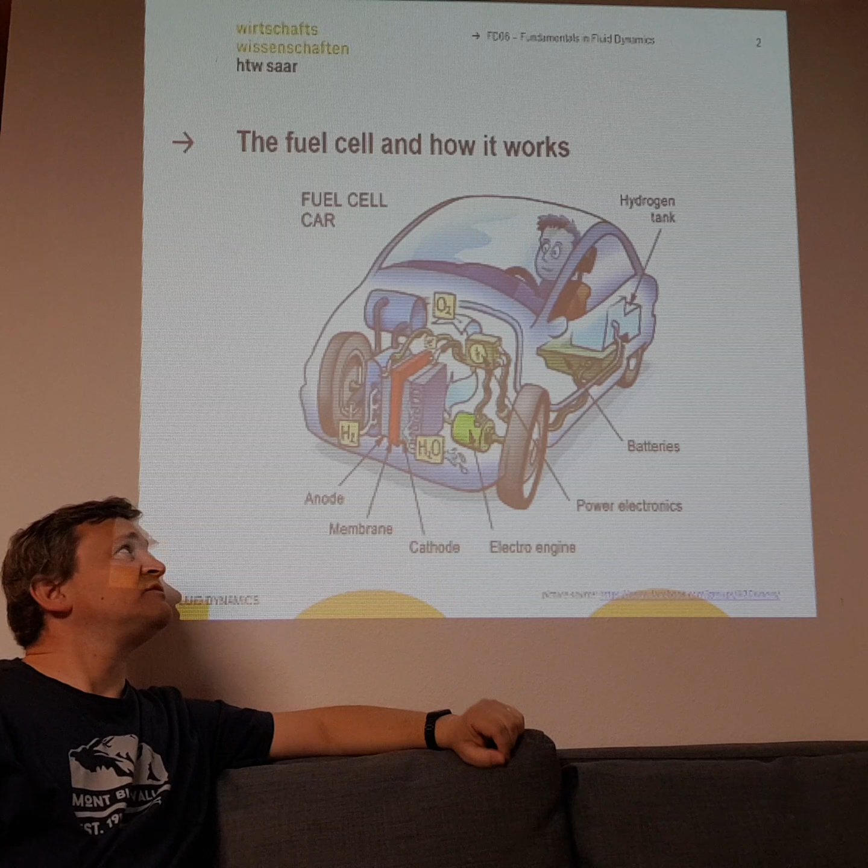At first, you ask me why do we need fluid dynamics? We have learned a lot about fluid statics, we have learned about the fluid properties, and fluid dynamics is still a really important topic for all kinds of technologies. And even if we get a change now from combustion engine cars, combustion engines have a lot of fluid dynamic problems, but even if we change now to fuel cells, to hydrogen fuel, we will have a lot of fluid dynamics problems.

For example, if you have here a kind of fuel cell car, we have fluid flow at different positions. We have fluid flow of water, and we have also big problem of cavitation, of icing here. We have fluid flow of hydrogen, we have fluid flow of water. We have to cool the batteries, and we have to look also at the hydrogen tank, and we can have also turbochargers for hydrogen or for air. And that's all fluid dynamic problems. So we must have a close look at fuel cells now in future.

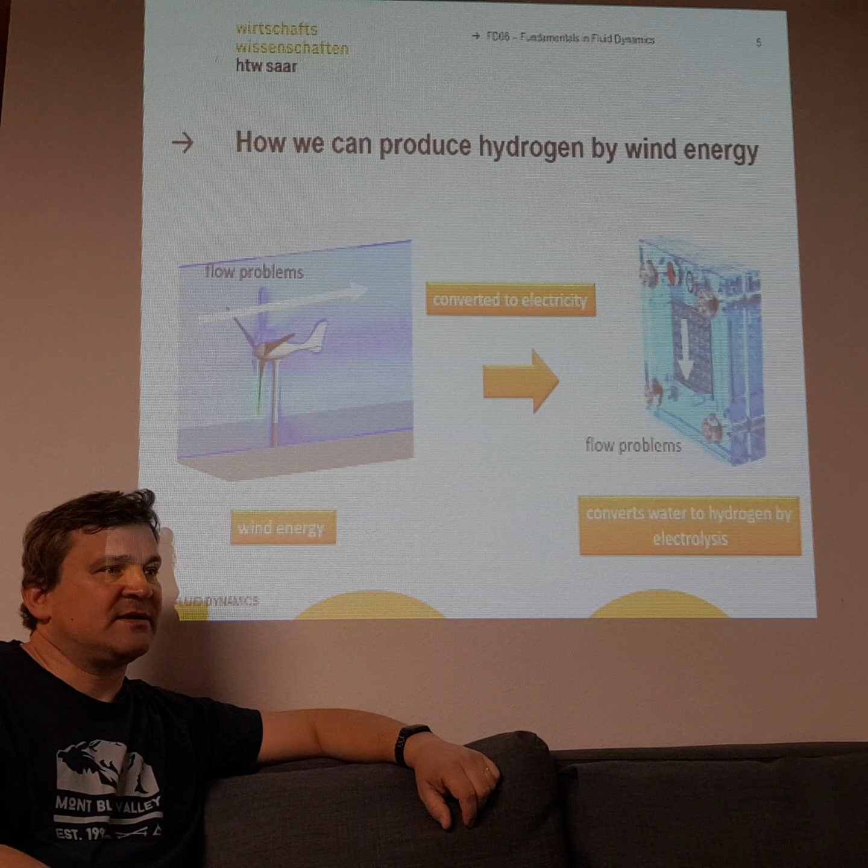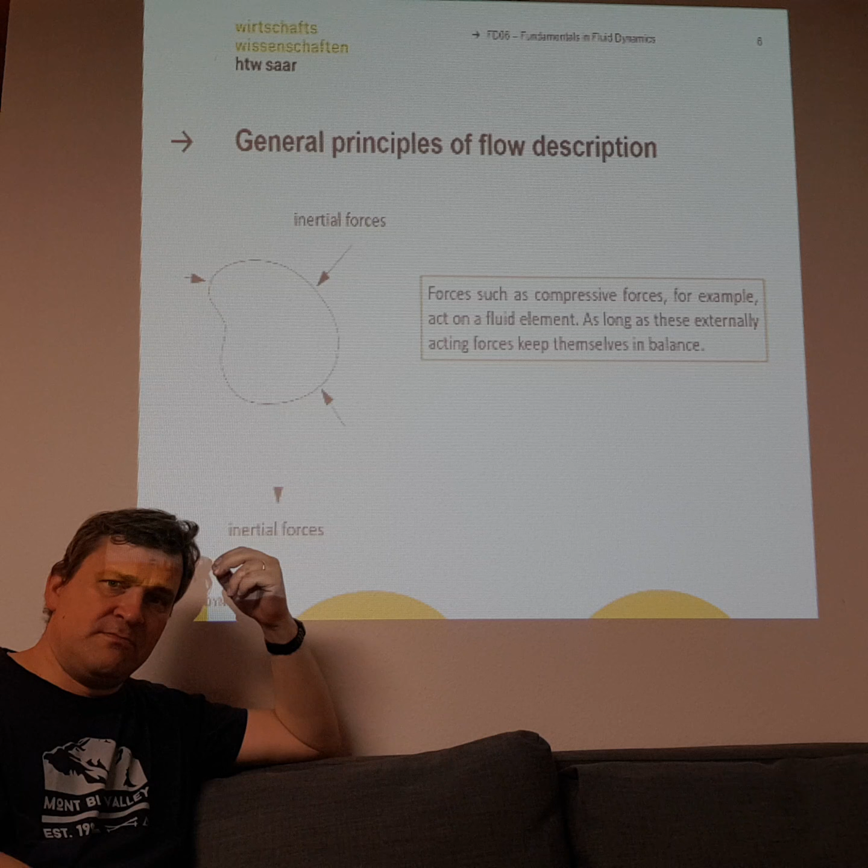And we have here this interesting windmills and wind technology, and we want to make CFD simulation of such a windmill. So fluid dynamics is important for you if you look closely at the production of energy by wind, but also in storing energy. Fluid dynamics is an important topic.

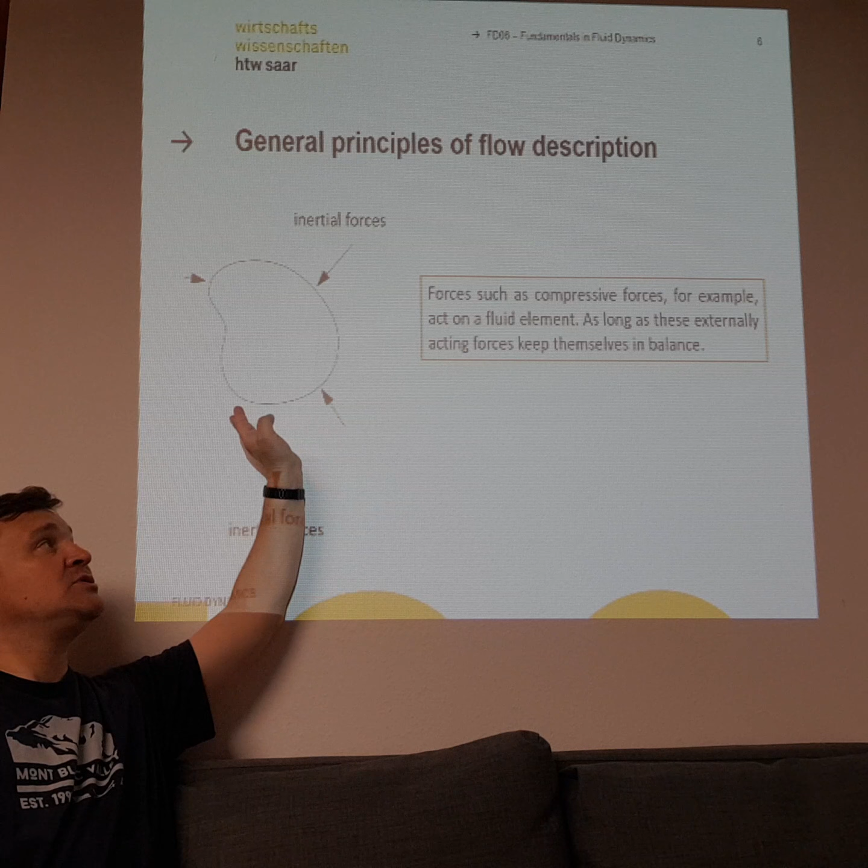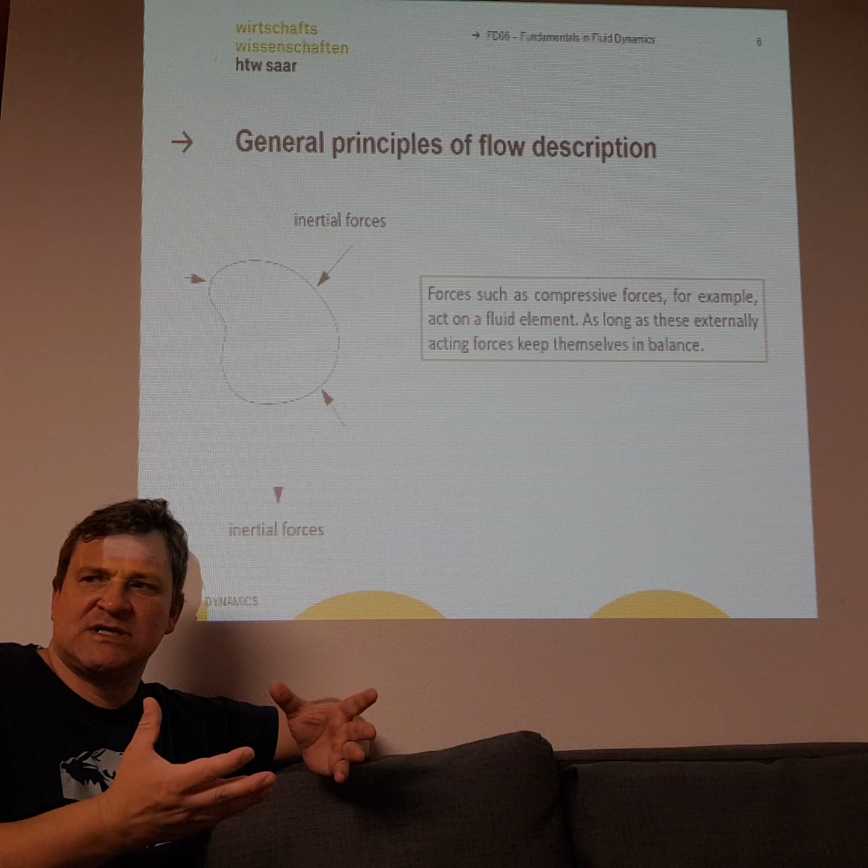For example, here we have a fuel cell, and the fuel cell converts water to hydrogen by electrolysis, and you also have flow problems around the fuel cell. You have heating problems, you have cooling problems. So at the production of the electricity, you need knowledge of fluid dynamics, and also if you look at the storing of the energy, you will get fluid dynamic problems.

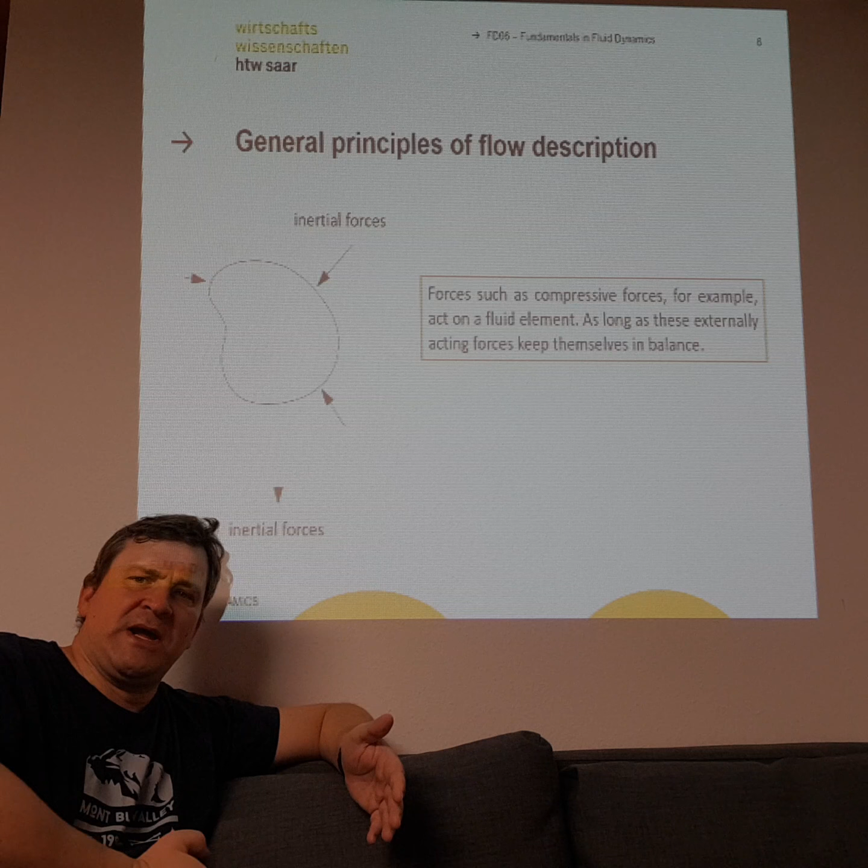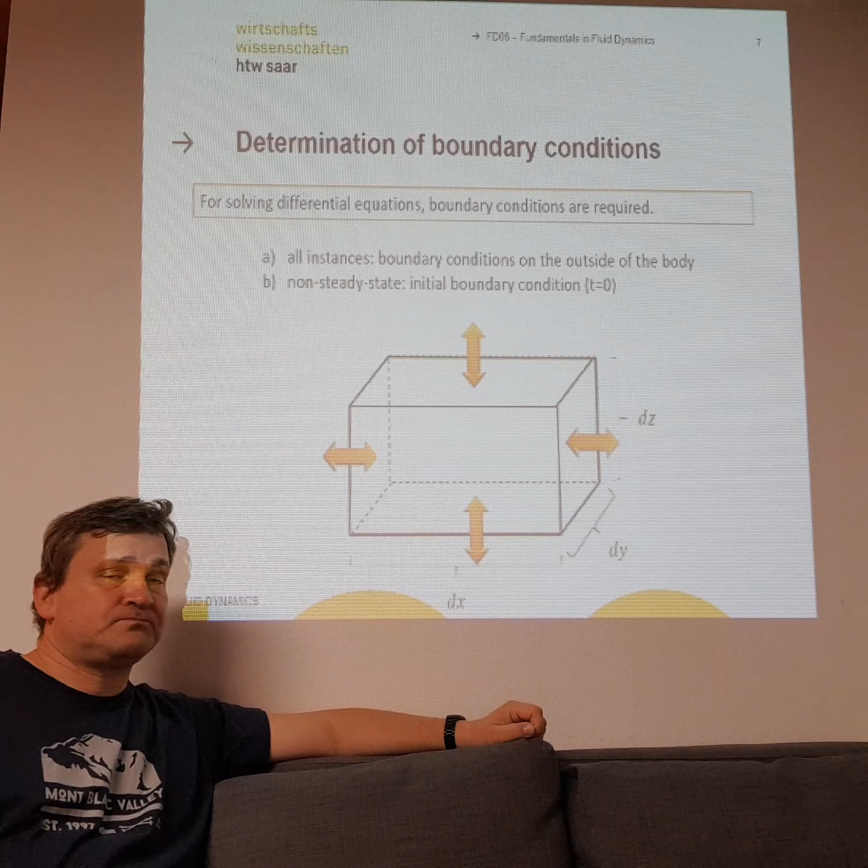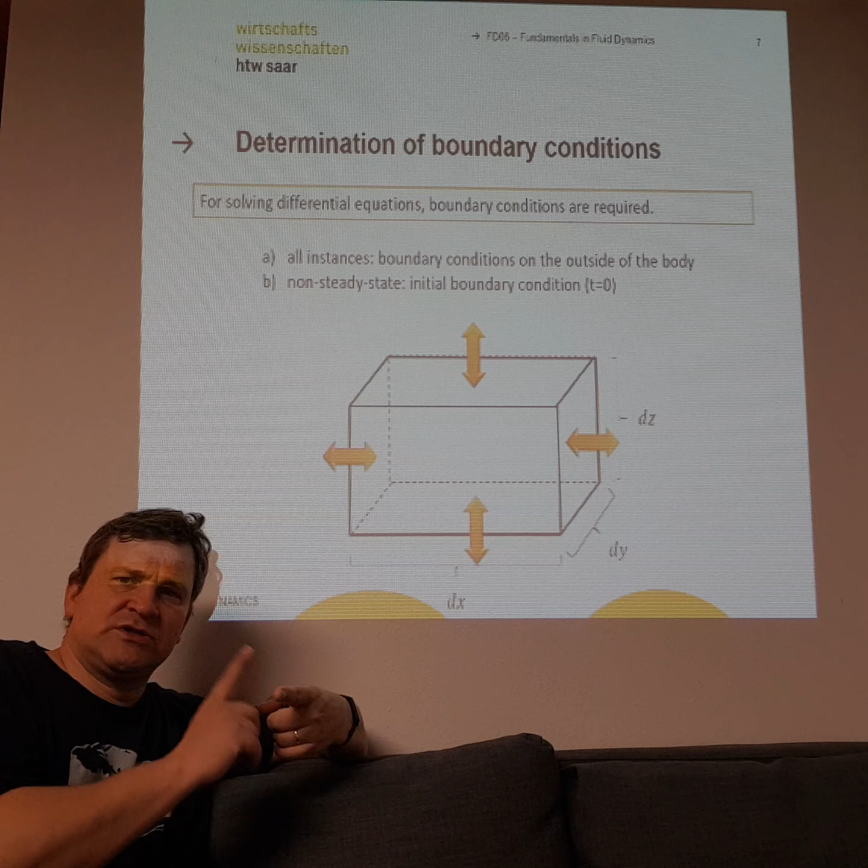Okay, so let's look at the principles of fluid dynamics. So you have a motivation. Fluid dynamics is really modern, is a really important topic, and the general principle of fluid dynamics is that you have a control volume. You have here a volume of air or of water, and you have forces acting on this volume. You have inertial forces here, and you have compressive forces on this fluid. But you can imagine, if you have a fluid like a bubble, or like an area where water is, and if you now act with forces on this region, the water will flow away, or the air will flow away. So you will always have an interaction of the fluid with the inertial forces.

To describe this, we will divide the fluid into cells. We will define volumes, control volumes, and here is an example of a control volume, and we divide the whole volume in such control volumes, and then we have boundary conditions, we have forces acting on the control volume, and we will have forces inside the volume that will influence the movement of the fluid. And important at the first step is you have to know a lot about geometries, you have to know how big such a volume is, how you can calculate the volume, how you can calculate areas around this volume.

And in many cases it's also important, the problems are not always steady state. Steady state means you have a constant influence from the side here or from the side here, and if you have non-steady state problems, the force might change, or a velocity might change, velocity at the boundary condition.

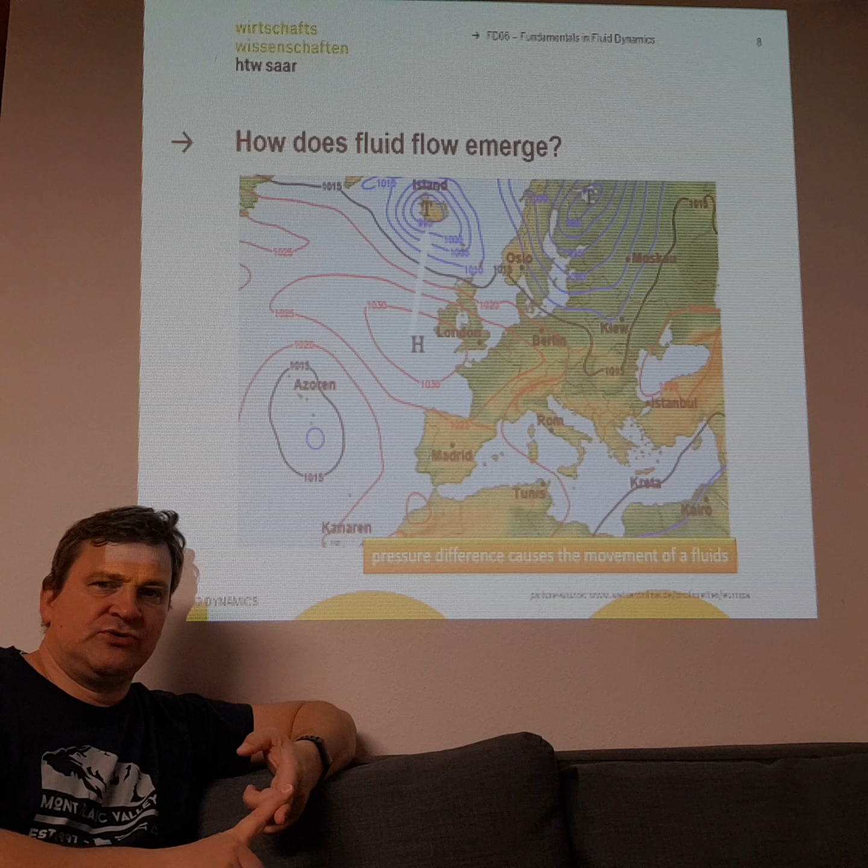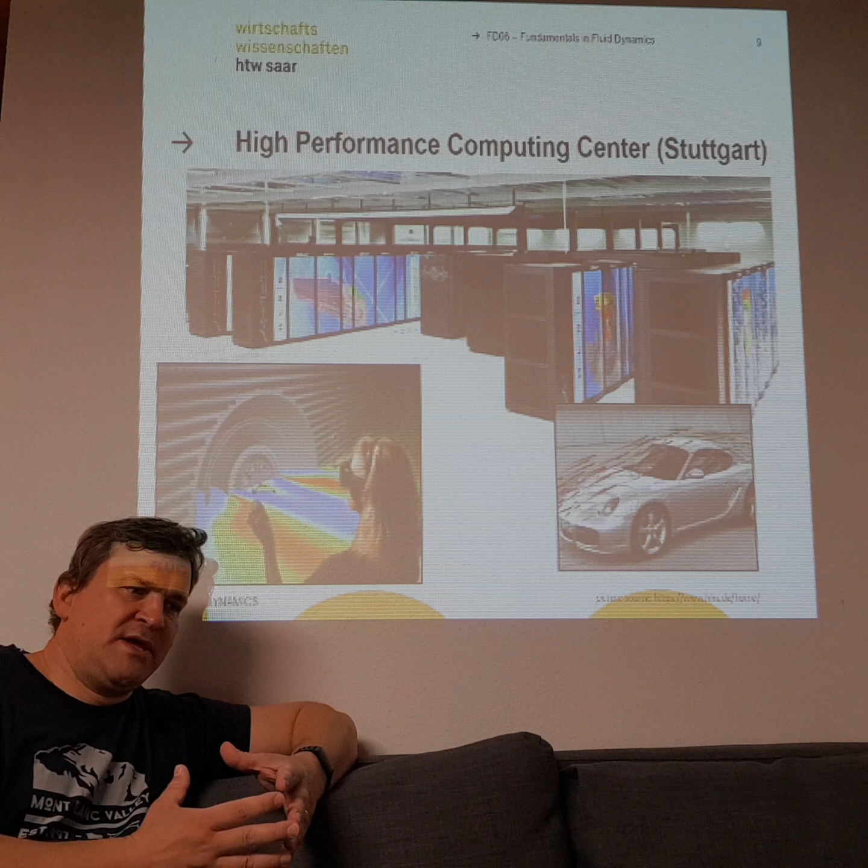So the winds come from the Atlantic Ocean here, and Europe is mainly influenced by this kind of west winds. And why do we have west winds on many days? Because we have really high pressures here over the Azores Islands, and we have really low pressures here over Iceland. And what will happen if we have high pressure here, low pressure here? The velocity will rise from the high pressure region to the low pressure region over Iceland,

and this will cause the weather and the winds, and the winds will take the clouds with them, and then we have nearly always good weather here, and we really often have bad weather here in the upper region. Okay, so what is important here? Please always remember, the fluid will always flow from the high pressure region to the low pressure region.

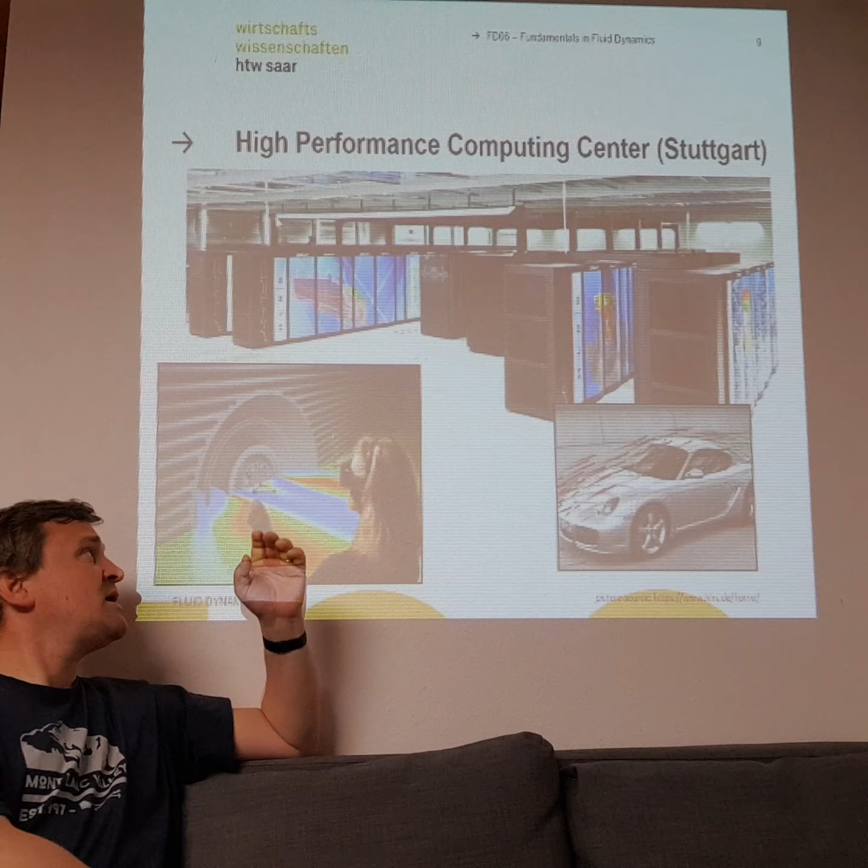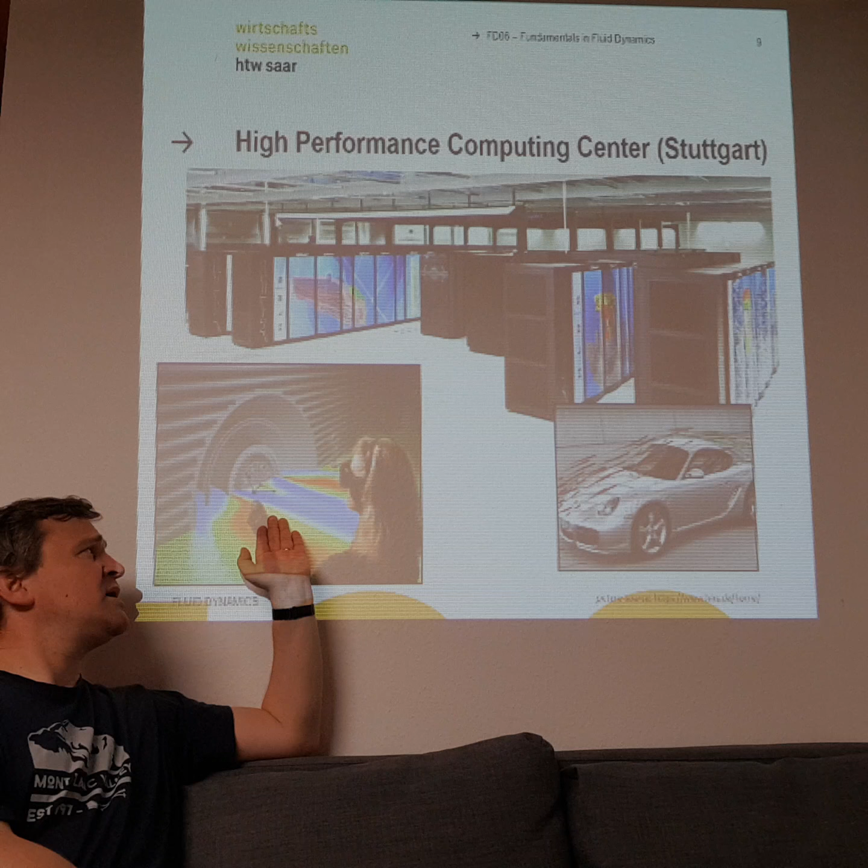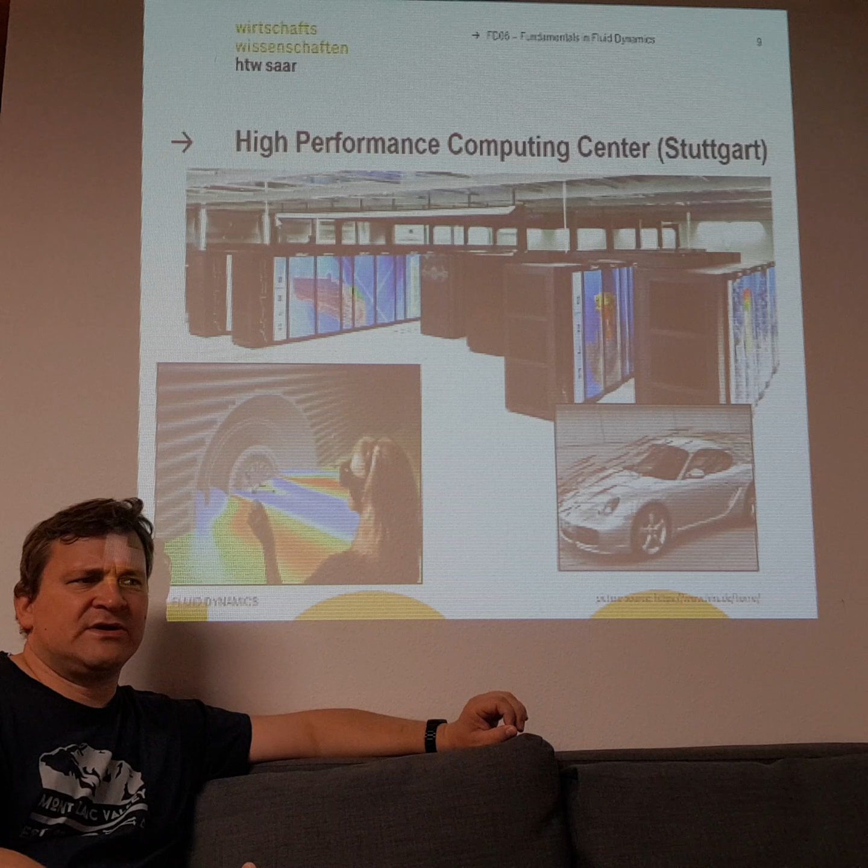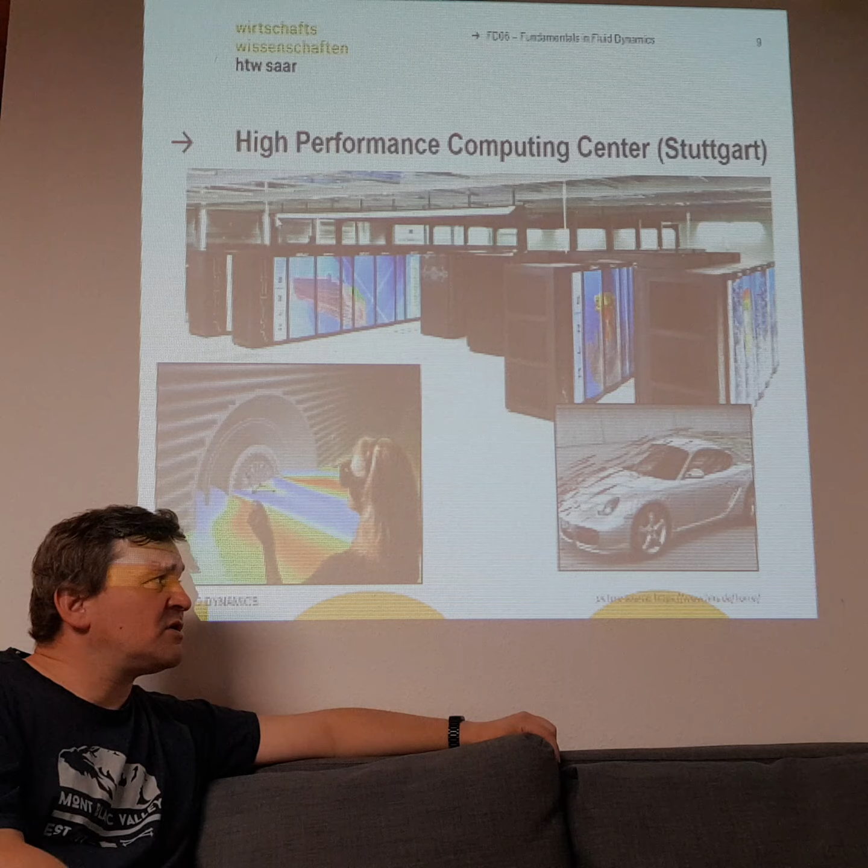Okay, and how can we make this weather forecast? How can we produce a weather forecast? A weather forecast more or less is a really big and time-consuming simulation. It's a computational fluid dynamics simulation, more or less a fluid flow simulation and a heat transfer simulation. And to do the simulations, we need really big machines.

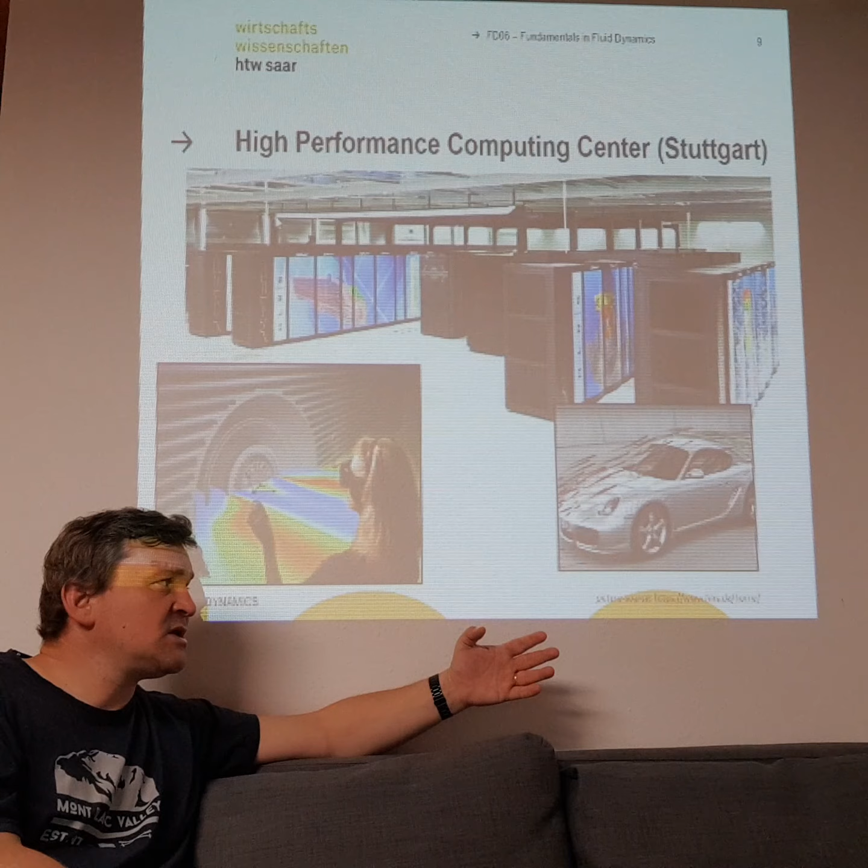Here is a computer of the High Performance Computing Center in Stuttgart, and I've also made a lot of simulations at this computer center. For example, here you can see fluid flow inside a coal-fired power plant. That's really similar to a weather forecast. You have to calculate where the air and the oxygen should be, and where the regions are where we should inject the coal particles. So you can compare it: building a coal-fired power plant is really comparable with a weather forecast simulation.

Or for example, here is a picture of a car, and it's a really good visualization of fluid flow around the car. You can have higher pressures at some regions, lower pressures, turbulences, and so you can design the geometry of your car.

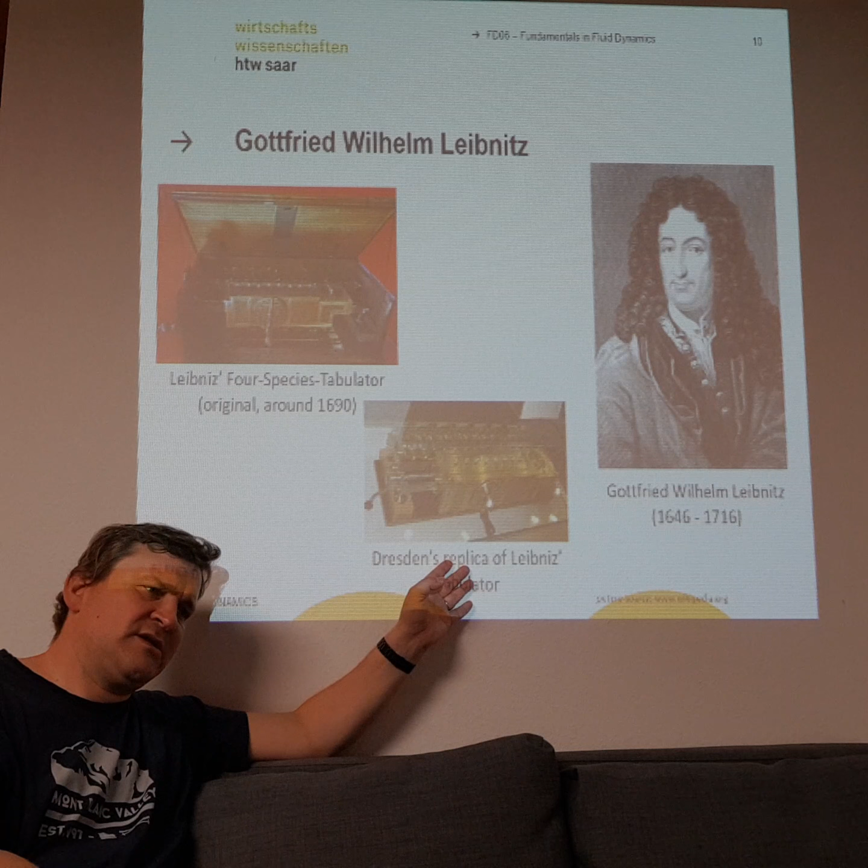Okay, I showed you these really big computers of the High Performance Computing Center in Stuttgart, the HLRS. You can also find it on www.hlrs.de. But a lot of the theory I teach you is really quite old. For example, I mentioned the Bernoulli equation in former lectures.

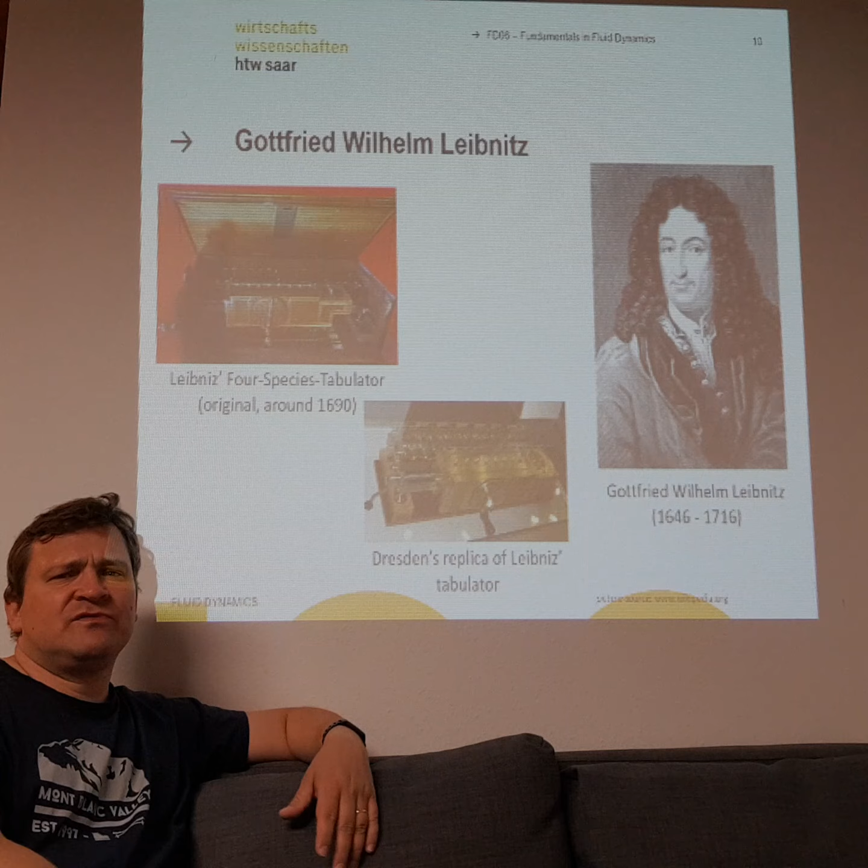I also want to mention Gottfried Wilhelm Leibniz. He lived in the 17th and 18th century, and he also did a lot of simulations, or calculations, for fluid flow problems, and he also had computers. He built his own computers. Now you ask me, how could he build computers in the 18th century?

But they built this kind of mechanical computers, and they still exist, and they didn't do this for fun. If you have a look at the slides, they look really expensive, and in former times these computers were as expensive as the big computers today, and they also used them for computational fluid dynamics, and they had really similar theories as nowadays.